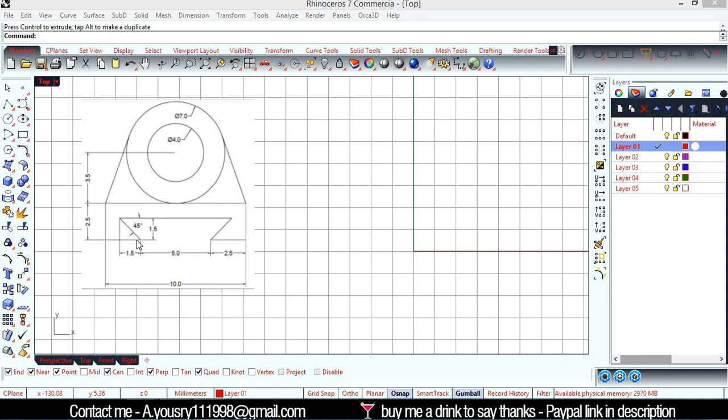Here I want to draw this second one. So I'm going to start with these circles, one is 4 and the other is 7 millimeters. I'm going to hit circle, enter, then go to draw from the origin. I'm going to hit 0, then hit OK.

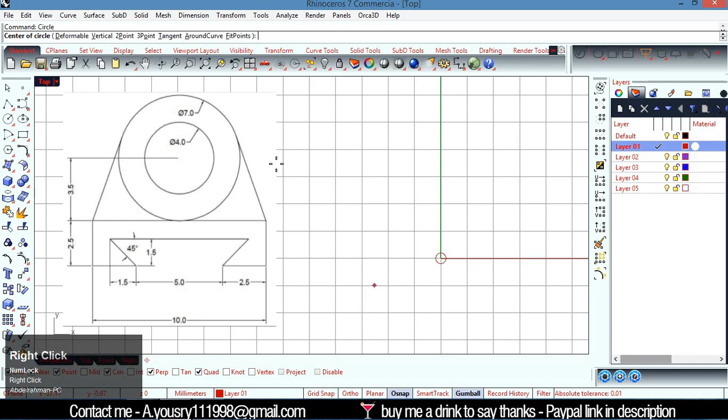Then type 4, but that's 4 in diameter, so I'm going to pick the diameter here and type 4, then hit right click again to get the last command, go to 0, type 0 and enter, and then 7. Okay, that's too small, so I'm going to do that again.

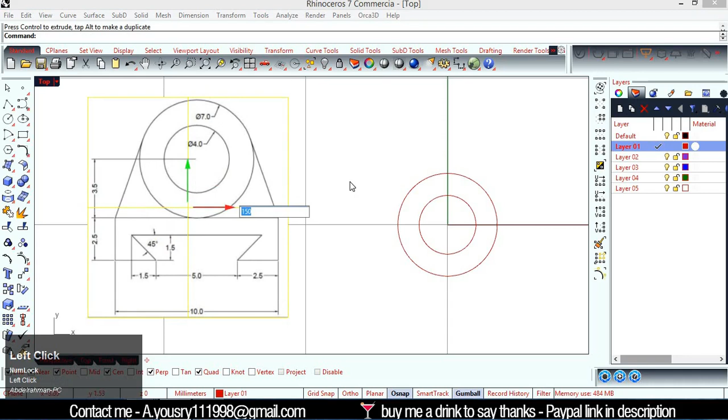Just to understand and see what keys I'm going to type, so you can find it here. This shows that I'm holding. Okay, hold in here.

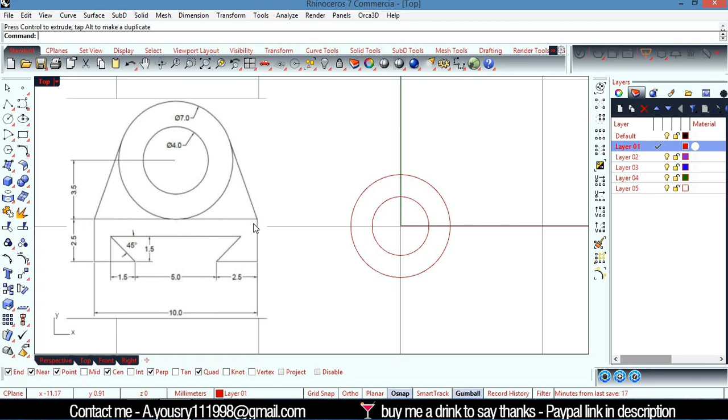After that, there is a line 3.5 millimeters away from here, and its length is 10.

So I'm going to do that by going to line here. From midpoint hit 0, it's a place, and then type the end of the line is going to be 5. Enter, and then hit shift to make sure that ortho is on.

I'm going to take that and tap here. It's going to be 3.5, so it's going downward, opposite in direction here, so it's going to be negative 3.5.

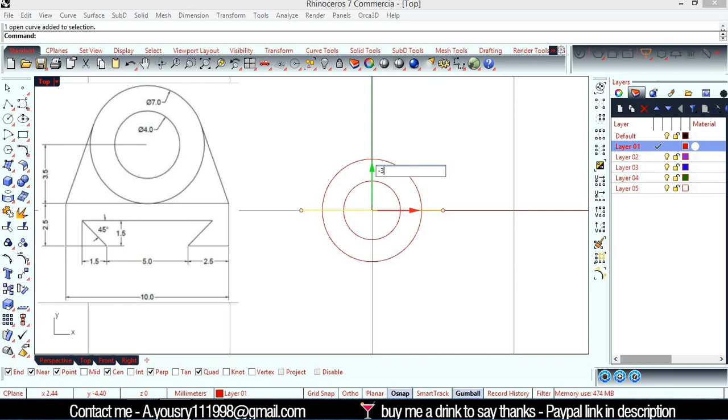Alright, and then here is a tangent line from this circle to here.

So the way I'm going to do it, tangent from curve, it's tangent from here and then ends here, and also the same way the other side, or I just can mirror that one. I'm going to hit mirror about here, the center 0, and just tap shift to make sure it's ortho.

Okay, after that I'm going that one to be 2.5 lower, so that's negative 2.5. Control Z, just I want that to be copied, so I'm going to hold on Alt key, hold, and then tap here and hit enter.

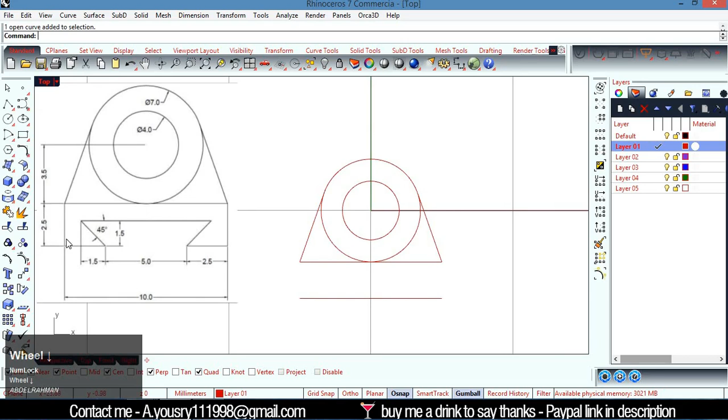Then 2 lines here, line. Okay, and then he told me that I'm going to move this part is 5 and then 1.5, and that's 2.5, right?

So the way I'm going to do it, I'm going to polyline, start from here, and tab 2.5 to take the length, and then make sure to, I have to start from here again, here, then 2.5, enter, and move like that.

And the other one is going to be 45 degrees, so it's from here to here, so 90 plus 45, so it's going to be 135. So I'm going to put the angle here 135, something like that, and just tap enter or right click.

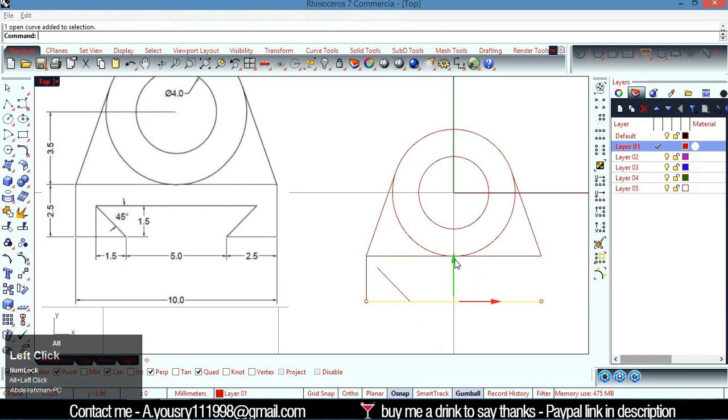Okay, I'm going to pick that one and that one to be 1.5 above, so hit tap on Alt, hold, tap here, be 1.5, something like that.

So I'm going to delete. I'm going to select all of these, trim, Control T, trim these, and also that one.

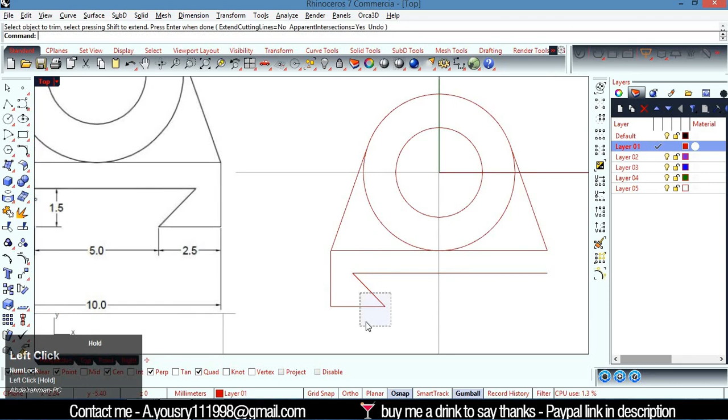I'm going to mirror that from the center, 0, enter, shift, and also that one.

Then select all of these, trim, Control T, and here we go.